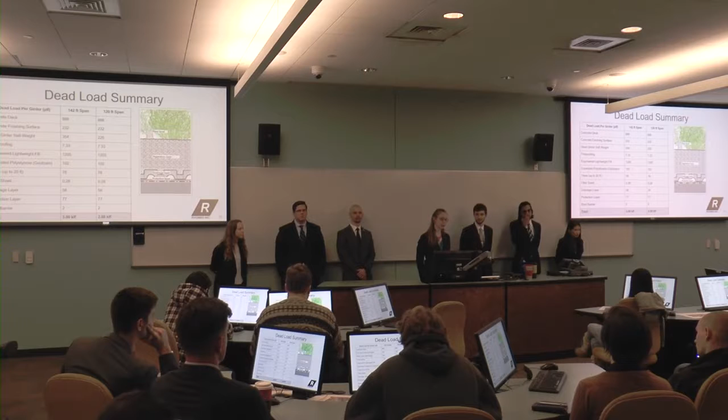Thank you, Nick. So the first step in determining loads was determining the dead loads on our structure. We included conventional dead loads like the deck and the girder self-weight, but we also had to determine dead loads due to the loads that would make this bridge a park. The couple of loads that I would like to highlight are the Engineered Lightweight Fill and the Geofoam.

Engineered Lightweight Fill is a material that has been designed for intensive green roofs, and it's actually designed to be lightweight yet support the growth of vegetation. And expanded polystyrene, or geofoam, is a high-performance lightweight geosynthetic fill, and this will be used to create interesting landscape features such as swales without adding a lot of extra weight to our bridge.

The next step was determining the live load, and for the live load we considered a couple different load cases. We have 4 load cases, and a lot of them are controlled by construction. One of our construction sequences uses a crane that is placed on the bridge to lift the beams, and that load case is actually in our first 2 load cases. The first load case is just the crane driving out onto the deck along with the dead load due to the girders and the deck.

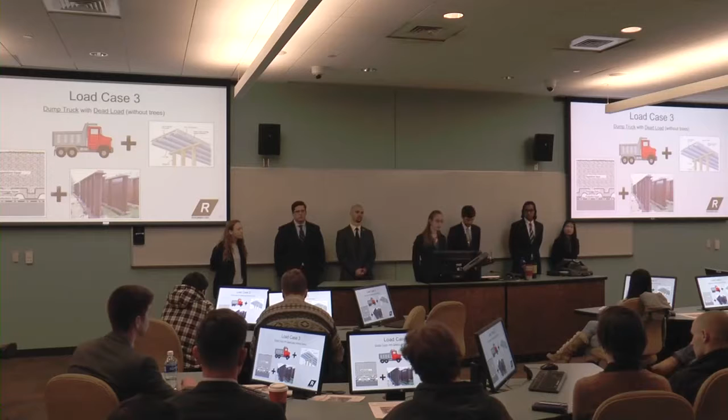The second load case includes lifting a 30-ton load along with the dead load due to the girders and the deck. The third load case is important when constructing the landscaping on our bridge, and this includes a dump truck with all the dead loads except for the trees. And it should be noted that this is the load case that produced the maximum shear and moments on our bridge. And the fourth load case is the one that will be after the bridge is constructed.

So it's the 90 PSF live load along with the total dead load. The live load of people, 90 PSF, can support the assembly load of people gathering for a Pens game, so it's enough. Also, this is the load that controlled our design because the live load was the controlling factor for the deflection.

In our girder design, we considered a couple of alternatives. We considered alternatives for girder geometries, various spans, and also our structural material. For girder geometries, we considered different skews. As the skew increases, the length of the girder decreases. However, the number of girders increases. Due to the increased number of girders in the highly skewed or mildly skewed bridges, the parallel girder geometry was actually the most efficient and cost-effective solution. Therefore, we chose the parallel girder geometry.

We also looked into one span versus two spans. I-579 is a very heavily traveled road, and we didn't want to put piers if we didn't have to. However, the cost of piers was not as significant as the difference in the cost of superstructure material costs. The table here highlights the $5 million difference in superstructure material costs. Therefore, we decided to move forward with the two-span bridge arrangement.

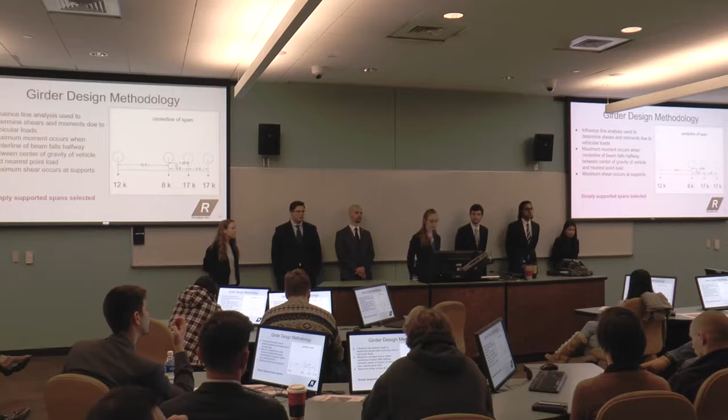In our alternative analysis, we also looked at the differences in steel versus concrete for superstructure material. We ultimately chose steel because of the lighter weight of the steel, as one of our construction sequences required placing a crane to lift the beams on the bridge. The heavier weight of the concrete and the heavier weight of the crane would cause us to over-design the structure a lot more than the steel.

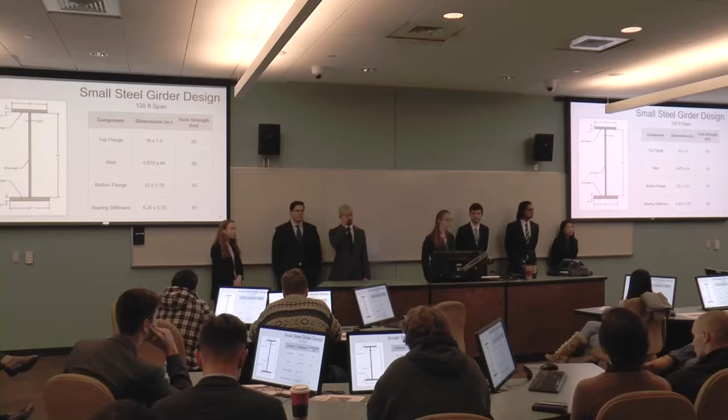Here we designed the small steel girder design. It should also be noted that we looked into using rolled shapes for this instead of just plate girders. However, even the largest W44 cannot accommodate the L/500 deflections that are specified by the AASHTO Pedestrian Bridge Design Guide. The large steel girder design is 6 inches deeper, and this is accommodated in our piers, which Laura will talk about more later on.

One thing to note is that we use 70 KSI steel, or high performance steel, for the bottom flange. It's more efficient to use high-performance steel in the bottom flange in positive moment regions. This also helps to lower the plastic neutral axis into the top flange from the stiff and relatively thick concrete slab, and therefore all of the concrete is in compression and most of the steel is in tension.

The other thing that we would like to note is that bearing stiffeners were designed, although they are not pictured here. The bearing stiffeners help to accommodate for maintenance. The bearings do not last the entire 100-year life of the bridge and therefore will need to be replaced. The bearing stiffeners allow those additional jacking forces to be accommodated when this needs to happen.

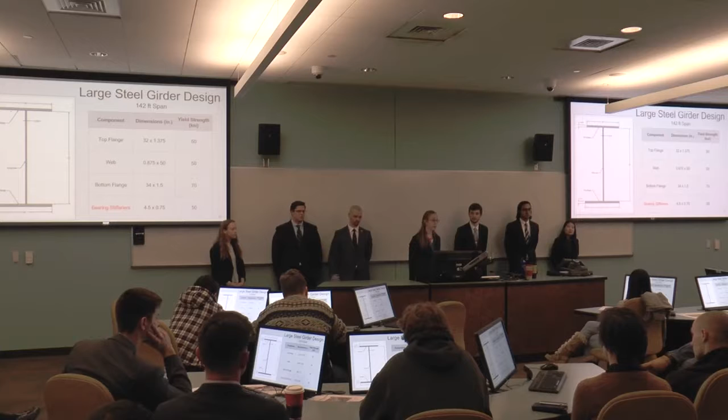Additionally, in our superstructure design, we included cross frames that will accommodate the lateral wind loads and provide structural stability. We use K-frame or K-brace type braces because the ratio of spacing to girder depth is greater than 1.5. And another thing to note is that since our bridge is skewed, there will be differential deflections between the girders. However, since our bridge is not skewed greater than 45 degrees, the differential deflection loads will not be greater than construction-induced forces.

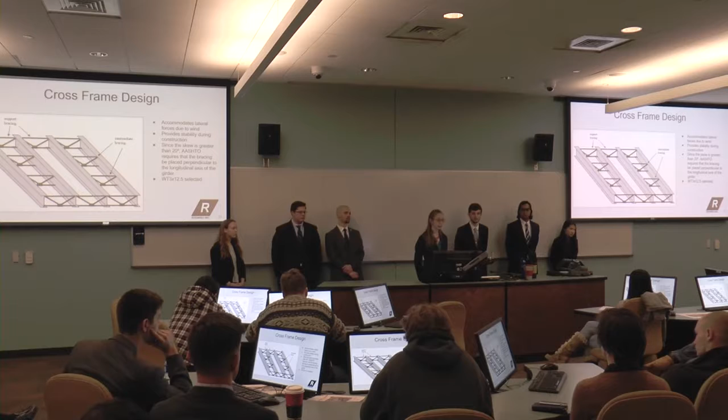So now I will pass it off to Shar to talk about deck design. Thank you, Becky. So for the deck design, we opted to use precast slabs over the more traditional cast-in-place concrete. We believe precast slabs are less time-consuming and more economical. They also have the added advantage of no formwork necessary. And when you have a structure spanning I-579, formwork becomes a huge liability. So it's something that we did not want to use at all.

We will also be using lightweight concrete, 5 KSI strength and 10-inch thickness. The lightweight concrete is being used to take some of the load off of the girder. The 5 KSI strength and the 10-inch thickness are being used to plan for future loads and hopefully help reduce maintenance in the future. And then we will be using a Xypex additive, which is basically just an additive in the mix design for waterproofing. And then lastly, we'll be using a 2-inch cast-in-place future wearing surface, which is just another protection layer for our load-bearing precast slabs.

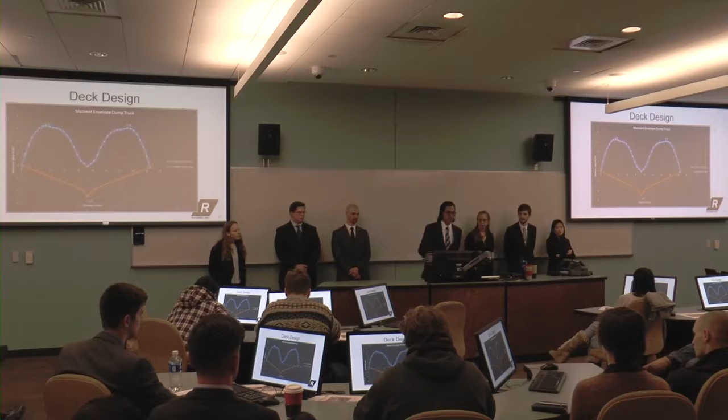So for the deck design, the load cases that were considered were the dump truck with the dead load without trees and a 90 PSF live load for the pedestrians with the total dead load. So to analyze the dump truck going over the slab, we did a line beam analysis and the following moment envelope was created. As you can see, the blue line represents the positive moment and the orange line represents the negative moment. Please keep in mind that these values were calculated after the strip width equations were implemented.

And we also want to do a little comparative analysis. So we created a finite element coarse mesh for our slab and then loaded our dump truck on it at a critical location just to see if my structural analysis on the moment envelope was correct. And the numbers did come out relatively the same, so we were pretty confident with the line beam analysis. And as you can see on the right, it's an exaggerated view of how the slab will deflect when the dump truck gets loaded onto it.

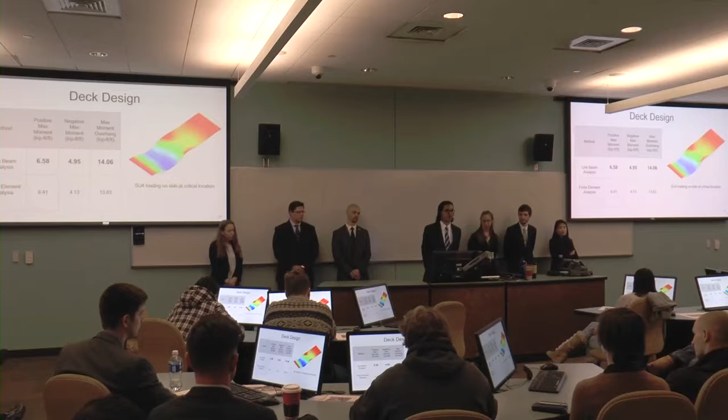So comparing the dump truck with the pedestrians, it's pretty clear to see that the dump truck will control the loading for the deck. It has a higher max positive moment, max negative moment, max overhang, and max shear. And then here's a summary of my results for the deck. Please keep in mind that the additional overhang reinforcement was only designed for vertical loads.

And here's a cross-section drawing of the deck. That concrete parapet will just be used as a retaining wall to hold in the soil and nothing else. And this cross-section shows the transverse and longitudinal reinforcement used in the deck.

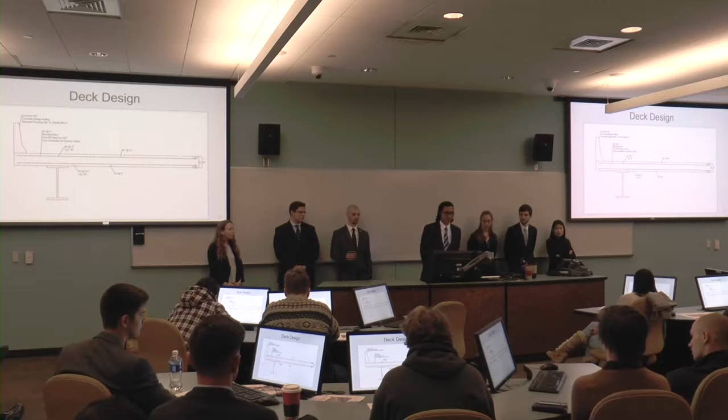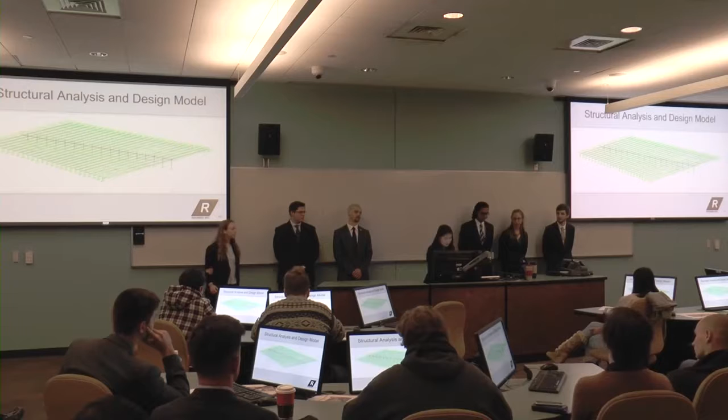Thank you, Shar. So in addition to the analysis that Shar just discussed, due to the complexities of the geometry of our structure, we also decided to run it in STAAD to confirm our values. The most conservative values were used for the analysis. But here is a wireframe model of our base structure. And here is a 3D rendering of the composite deck.

Currently, any rainfall at this site is collected and drained along I-579. But after our structure is put in place, the rainfall will follow the pattern of the 1% slope and will accumulate in the lower left corner. At the abutment at this point, we will have a pipe that will extend under the park and will reach the inlet, and it will tie in there at the inlet at the intersection of Bigelow and Chatham Street.

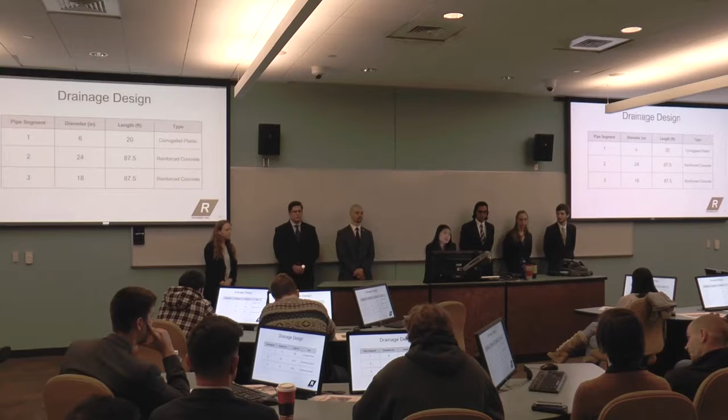For material for the drainage layer, we decided on the Floradrain FD 60. For those of you who don't know what this material is, it's a thermoformed recycled hard plastic that is very lightweight, with a high retention rate for water and a high drainage capacity.

And now I will pass it on to Laura to discuss the bearing and pier design. Thanks, Carol.

So for the substructure, we considered multiple pier geometries. Our first alternative was single span. This would be ideal because there would be no interference on I-579. However, as Becky discussed earlier, this alternative was very expensive.

Our next alternative was 2-span. This involves placing one line of columns on the elevated I-579 southbound ramp. Considerations for this alternative include slight lane relocation and also consideration of how the piers will affect the existing retaining wall.

The third alternative was to switch from 2 to 3-span. For this alternative, you have one line of columns on the I-579 northbound ramp, and it then changes to 3-span. However, with this alternative, there were shoulder width requirements that were not met on the I-579 north ramp. So we decided to go with our 2-span alternative.

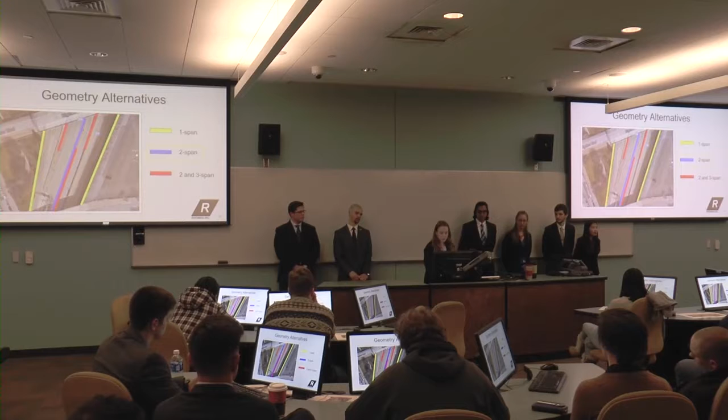This shows the existing geometry of the roadway. There's a 12-foot shoulder. Adjacent to that is a lane that ranges from 12 to 20 feet, and adjacent to that is another 12-foot lane.

With the addition of our 4.5-foot wide pier, the 12-foot shoulder will be maintained. The lane adjacent to that will be reduced to 12 feet, and the lane adjacent to our piers will be roughly 12 to 16 feet in width. We wanted to include any extra width in the lane adjacent to our pier to reduce crash ratings.

So we considered multiple pier types for our design. We eliminated solid wall pier from the design. This would be too much concrete and too much interference on the existing roadway, so it would be too expensive.

Preliminary designs were developed for the hammerhead pier and the rigid frame pier. For the hammerhead pier, overturning of the pier cap was a major concern. So we concluded that hammerhead piers are more suitable for narrow and taller structures, whereas the rigid frame pier is more suitable for a wider and shorter structure, which is characteristic of our bridge deck.

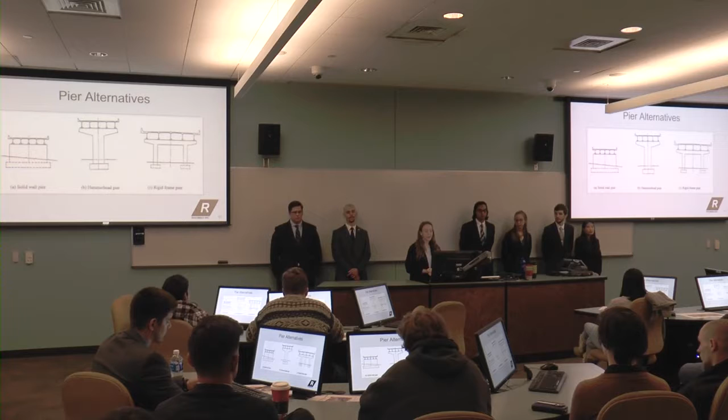The rigid frame pier reduced the amount of concrete required by 37%, and aesthetically is the better option as it matches the existing piers under the existing bridges. So we went ahead and selected the rigid frame pier design.

For the pier cap analysis, we used an approximate analysis method for simple frames, and from this we were able to calculate end cap shear and positive and negative bending moment. These were our values in the north pier. Strength 1 and service 1 moments were analyzed, and that helped determine the design for the cap. In the south pier, these numbers were reduced slightly as there are shorter spans over top of this pier, so there is less loading at that location.

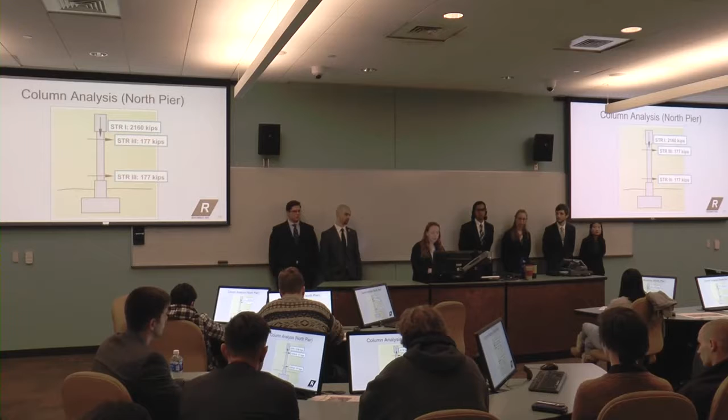For the column analysis, the vertical loads from the cap and superstructure were transferred into the column as an axial load, and then the shear and transverse loads were analyzed using Portal method, which yielded these values. These values were reduced; the axial load was reduced at the south pier. We also considered eccentric loading of the column, especially due to our construction sequence, and we considered longitudinal and transverse moments on the column. Our crash barrier, in compliance with AASHTO, was designed for a 400 kip impact load at any angle.

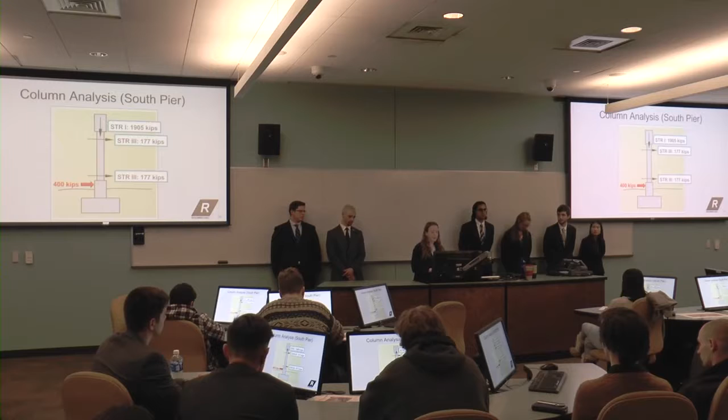So here's a drawing of our pier. We have a 4x4 foot cap, a 30-inch round column, and a 3-foot tall and 4.5-foot wide crash barrier. In the cap, we have number 11 bars to 9 at the top to resist negative moment, and 18 at the bottom to resist positive moment for the north cap.

This was reduced to 15 bars in the south cap. We have 6 legs of number 7 stirrups at 7-inch spacing in the north cap, 7.5 inches in the south cap. In the column, we have number 11 vertical bars, 12 in the north cap, 8 in the south cap. Number 3 hoop bars spaced at 12 inches. And we have number 11 bars at 6 inches in the crash barrier, and also number 3 bars at 12-inch spacing.

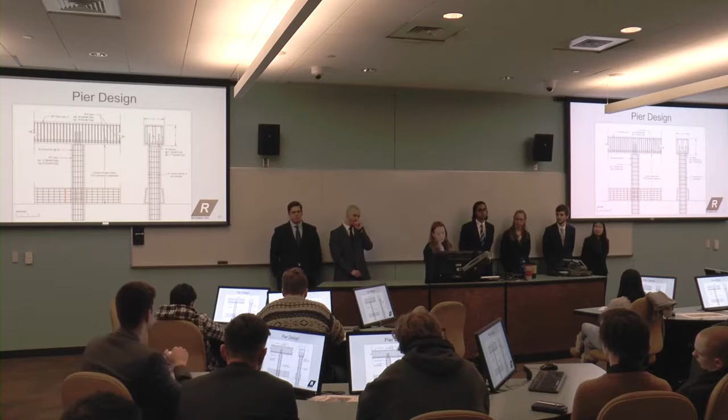And this is a plan view of a section of the pier cap, and 6 bars from the column will extend 27.5 inches up into the cap. These are both 4 KSI cast-in-place concrete material. So the 27.5-inch extension up into the cap will form the connection for the cast-in-place structure.

So here we're zoomed in on the bearings and pedestals. These will help transfer the load from the superstructure to the substructure. We have 3 combinations of bearings and pedestals. At the north, these are designed for the large girders. These are designed for the large and small girders. And then these are designed for the small girders.

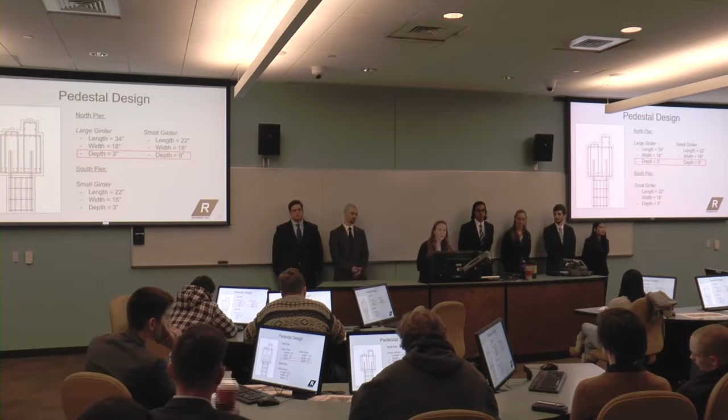So here's a summary of the dimensions for the pedestals, and also shown is a cross-section of our pier at a pedestal. As you can see, the reinforcement extends up into the pedestal. An important dimension to note is the difference in pedestal depth will account for our 6-inch difference in girder depth.

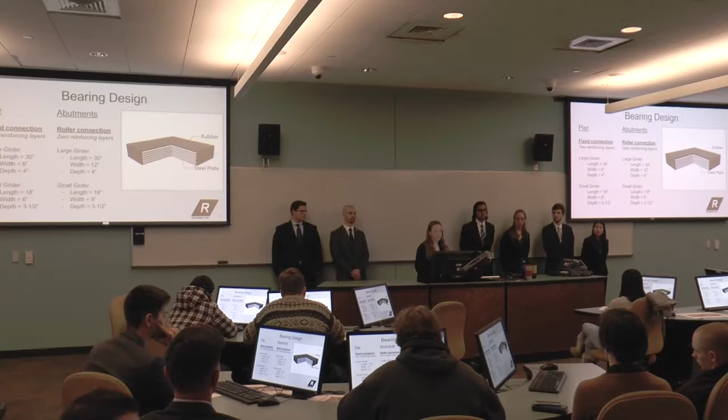For the bearing design, we use an elastomeric bearing with steel reinforcement. At the pier, we provided a fixed connection by designing 2 steel reinforcing layers in the bearing. At the abutments, we wanted to allow for thermal expansion, so we used zero reinforcing layers. And the bearing lengths are 4 inches less than the girder widths. This is to help transfer the loading from the superstructure into the substructure. Now I'll pass it off to Nick.

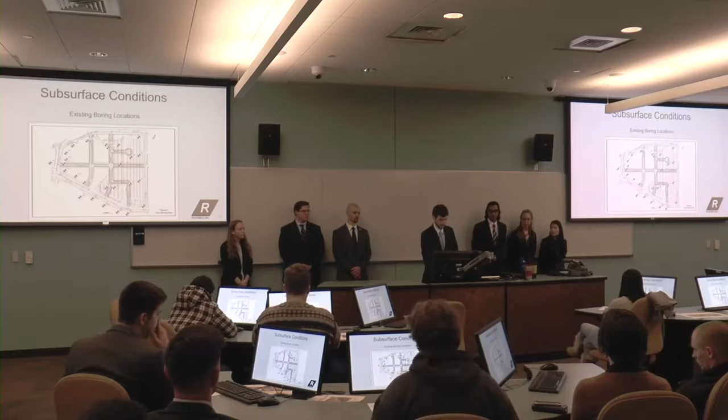Thanks, Laura. Now we'll get into the subsurface design and the geotechnical engineering portion of our design. Luckily, with the rest of the Lower Hill District redevelopment project, there were many borings done at reasonably close proximities to our structure. So we use borings close to our abutments and to our piers in order to design our foundations. Here's one example. It's just a boring terminated at 116 feet, and this gave us all the general information that we needed to do our geotechnical and foundation designs.

We had general soil classification, blow counts, rock quality designation, and from these values we could get all the design parameters that we needed, such as cohesion, friction angle, and the ultimate strength of the rock that we were intending to reach.

So one of the first parts of our foundation and geotechnical analysis was to make sure that the existing 2 retaining walls on either side of the roadway were capable of handling the additional overburden pressure from our new structure. That turned out to be 675 PSF. So we analyzed these existing walls using the existing designs that are pictured here. And you can see that we analyzed them for overturning, sliding, bearing, settlement.

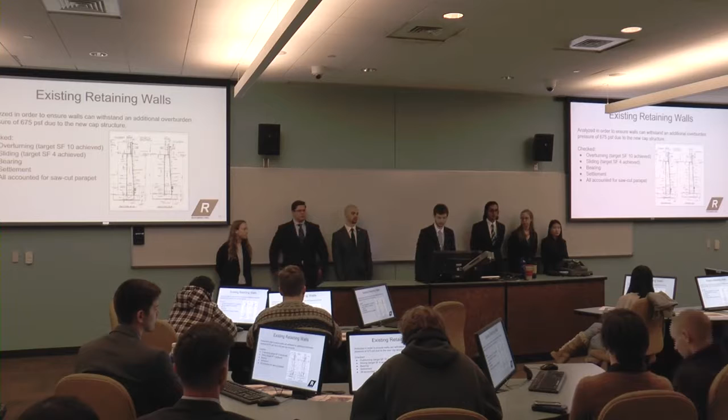And we also considered the slight modification that we had to make to them. We're going to be saw cutting the top off just to accommodate for the different heights of abutments. So all that being said, the walls are fine and all the target safety factors were reached. So no major structural modifications will have to be made to the retaining walls.

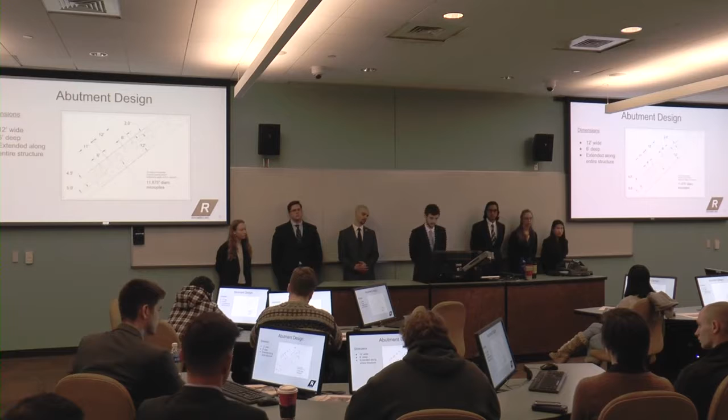The abutments will be offset 4 feet from the edge of the existing retaining walls, and so an extra 10 feet of girder extension will extend from the edge of our structure. And these square shapes will designate where each of the bearings that Laura just talked about will be located. The abutment in total is 12 feet wide, 6 feet deep, and they'll extend along the entire edge of each side of our structure. The circles around these bearing points designate the micropile locations that we decided to drill at these points.

These micropiles will be 70 feet deep. They'll be drilled through various shales, clays, and silts at the top, and then eventually reach a very solid, dense, and strong limestone at the bottom. That's where the end bearing will be resting. They'll be about 12 inches in diameter, half an inch thickness. As you can see in this previous slide, they're spaced out significantly, so group efficiency won't be an issue with the settlement of these piles.

They were designed for the axial capacity, which incorporates both the end bearing and the side frictional resistance of these micropiles. And also we selected micropiles to resist any future additional loads and also potentially uplift or eccentricity due to construction or future load increases over time. Also we designed for lateral loads. Settlement, which you can see over on the right, was determined to be 0.45 inches per pile, which is well within the range, 2-inch maximum. And also the grout strength for these micropiles was examined in the design.

So below each of the piers that Laura just mentioned, we were going to have drilled shaft caissons. These will be 40 feet deep to reach the bedrock below. They'll be a 30-inch diameter, just like the columns above. And they were designed in a similar way using Beta method for friction resistance and Meyerhof's approximation for end bearing for the axial capacity; just add those up, and that's your axial capacity of the pier.

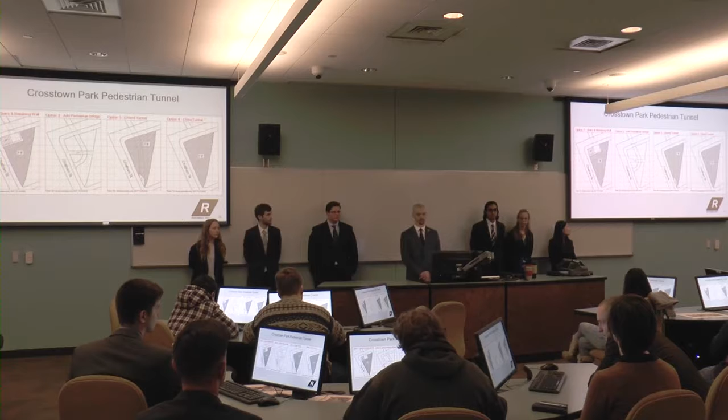Options 1 and 3 require ADA considerations, and options 1 through 3 require very considerable increase in costs and time for the design and construction management portions. So ultimately, as a team, we decided to move forward with option 4.

Another thing Grady mentioned that we had to take into consideration were roadway closures. Because of that, we came up with 5 different phases during the project that we would have to shut down different portions of the road. The first phase occurs during installation of the piers. It calls for the closure of Ramp D as well as an I-579 southbound 2-lane shift.

Phase 2 occurs during the demolition of the west retaining wall parapet. Phase 3 occurs during the demolition of the east retaining wall parapet. Phase 4 occurs during the installation of the eastern half of the beams and deck slabs. And Phase 5 finally occurs during the installation of the western half of the beams and deck slabs.

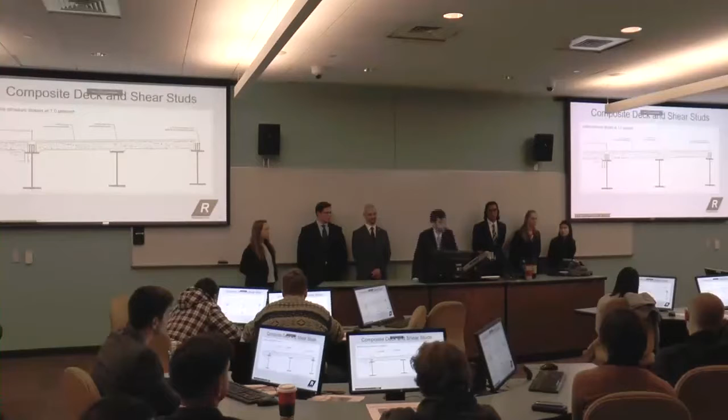Did you use any composite action in your design? Yeah, we did analyze both the girders and the deck as a composite material, and we used the shear studs as well as the wearing surface on top of that. If you look at your sketch, you see where your shear studs are? Yeah, let me go back to that real quick. Are you gonna fill that with what? Somebody has to explain how you're gonna put that. You see that your slab sits there?

If I'm not mistaken, your top flange is 18 inches, something like that. 1.5 inch thick, 18 inches wide. And then your studs, I don't know the spacing, maybe 3 inches or so. That's about right, yeah. And then, are you gonna fill that with what? That'll be filled in with the concrete wearing surface. So it's going to be 2 inches over the entire deck, and then whatever space is in between there will be filled with the concrete. And those studs are going to completely interact with the slab? Yeah, that's correct. Who said that? We might have missed that, or we should have talked about that in the slide with the slab design.

I did discuss this with one of our structural engineering professors, Dr. Harries, who says, I have doubts about this composite action. Okay, we'll have to look into that and consider your suggestions. I mean, the continuity of the concrete is not there. Are you concerned with the wearing surface's traction? No, it has nothing to do with that. It has a structural function. You know, they are called shear studs. And what kind of shear they are transferring, where they are transferring from, I have a little bit of a question. So I need some explanation.

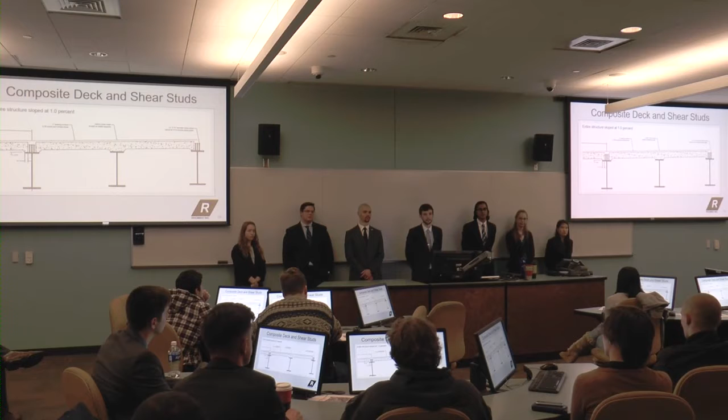Keeping along with that tunnel concept, did you realize that maybe you are building a tunnel on 579? Did you take that into consideration, and what complications that may create for the traffic down below? So based on AASHTO standards and verified by PennDOT, this is technically considered an underpass, just a very long underpass. But we've also considered fire safety, ventilation, and the lighting that will be needed, because it's going to be dark in there. That's included too.

And then with regard to the art up above, this is going to be a showpiece for Pittsburgh. I would imagine there's a lot of aesthetics, benches, fencing, lighting, irrigation. Is that all considered? Yeah, that was all added in the landscaping for the project.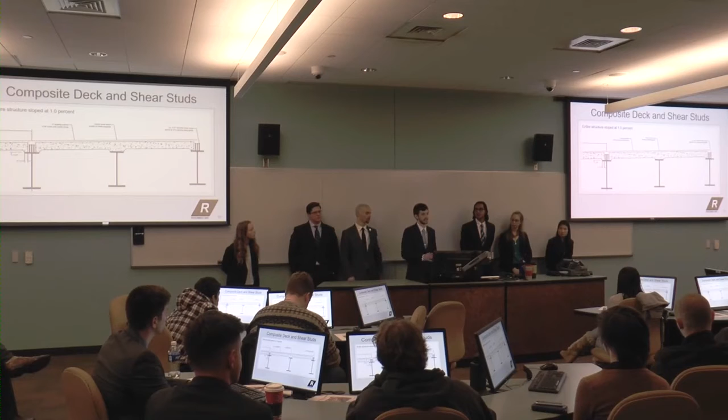I have one more. Did the weight of any stormwater that you will hold affect any of your calculations? Because especially if this is getting public money, you'll be required to hold or reuse a portion of that stormwater on site. Yeah, so we considered the loading of the saturated soil in our structural design, and with that drainage outlet, we sized it so it would act as a retention basin, flowing into the combined sewer system at the required rate.

And we had thought about, we didn't do any complete designs, but potentially you have a pump down there, maybe you pump it back up and water on a dry day. So that's something we could consider. Good work.